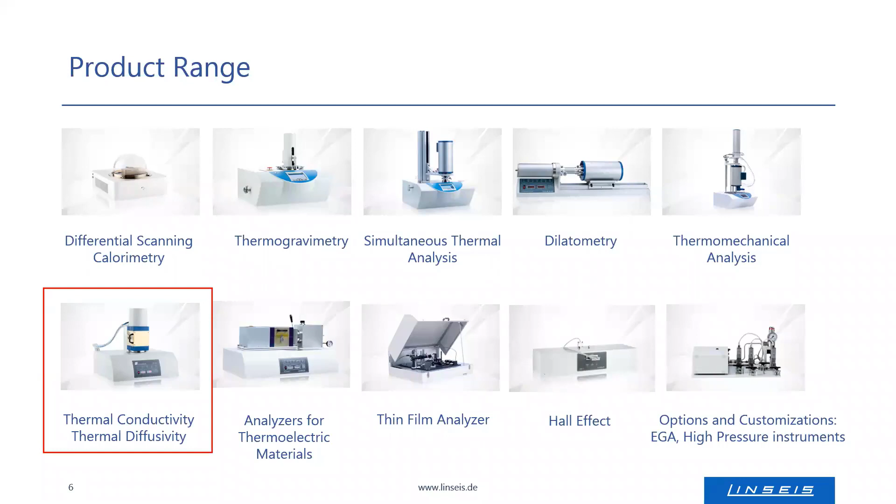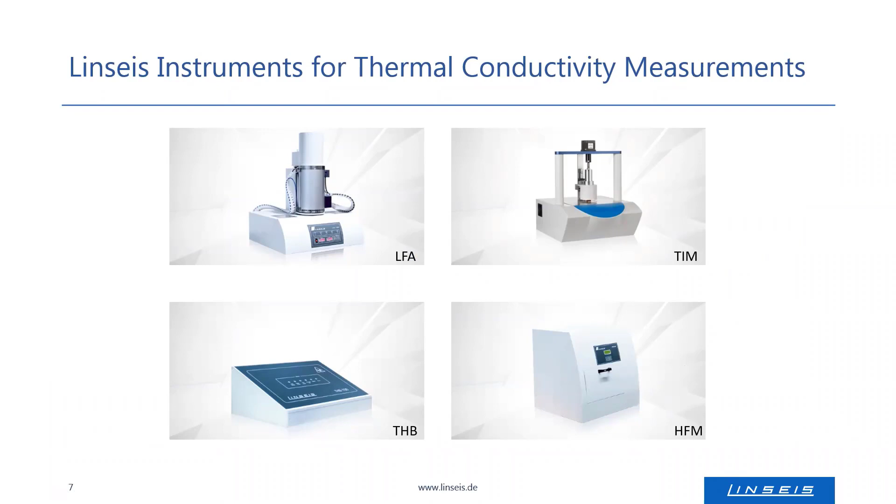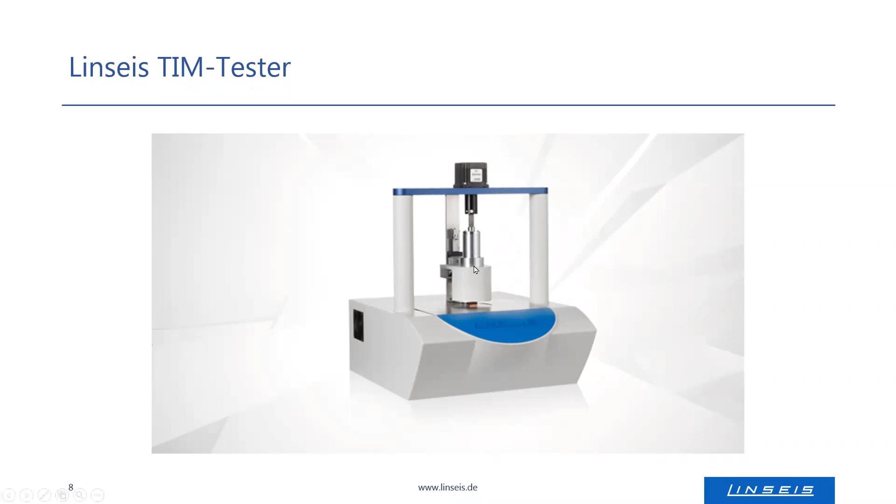So as already mentioned, the TIM tester belongs to the thermal conductivity instruments. Generally to this field belong the laser flash analyzer shown here, the TIM tester, the THB, and the HFM, which is mostly suited for building materials or insulation materials. So today's webinar will be mostly about the TIM tester and also thermal interface materials. What are these in general? And on this picture, you can see an older version of the TIM tester. We modified the system and now it looks like this one here in this picture.

So in general, the TIM tester is a universal device for the determination of the thermal conductivity, and the system is optimized for thermal interface materials and is measuring the thermal conductivity according to an ASTM norm, to which we come later. So here you can see the agenda of today's webinar. First, we have a look onto thermal interface materials in general. Then we will have a look onto the ASTM norm, which I just mentioned. And then we will have a look how this ASTM norm is realized with our TIM tester. And I will show you some application examples of the TIM tester. And in the end, the TEG tester for thermoelectric generators, which is a modification of the TIM tester, will briefly be shown.

So coming now to thermal interface materials in general. Modern technology and technical devices became much smaller and at the same time also more powerful. And the packaging of these integrated circuits is increasing. And thus, the thermal management, how to solve the heat dissipation, becomes a crucial parameter, since overheating of some components can also lead to failure. And the heat sinks are not as efficient as they should be, so often they cannot dissipate the heat optimally. And this depends on the contact surface of the material. And despite modern manufacturing processes, a certain surface roughness remains on these components, as shown here.

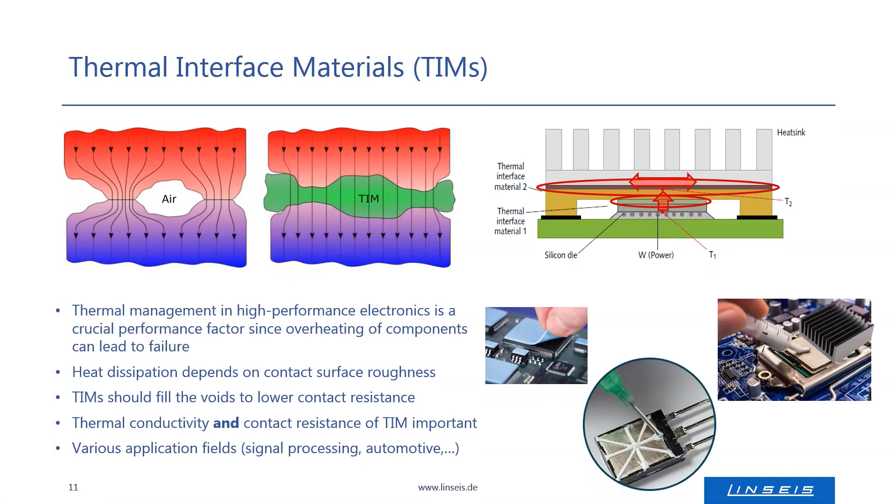The thermal interface materials can be grouped into three categories according to the ASTM norm. So type 1 would be viscous liquids like pastes, greases, phase change materials, or liquids. So these materials exhibit no evidence of elastic behavior or the tendency to return to the initial shape after deflection stresses are removed. So this is what characterizes this type.

Viscoelastic solids exhibit linear elastic properties with significant deflection relative to the material thickness, and examples for that are pads, tapes, foams, or gap fillers. And the third type of the thermal interface materials are the solids, like, for example, polymers, metals, or ceramics. And these types of materials exhibit negligible deflection. So if some stress is applied to the material, no deformation or just a really minimal, negligible deformation can be observed.

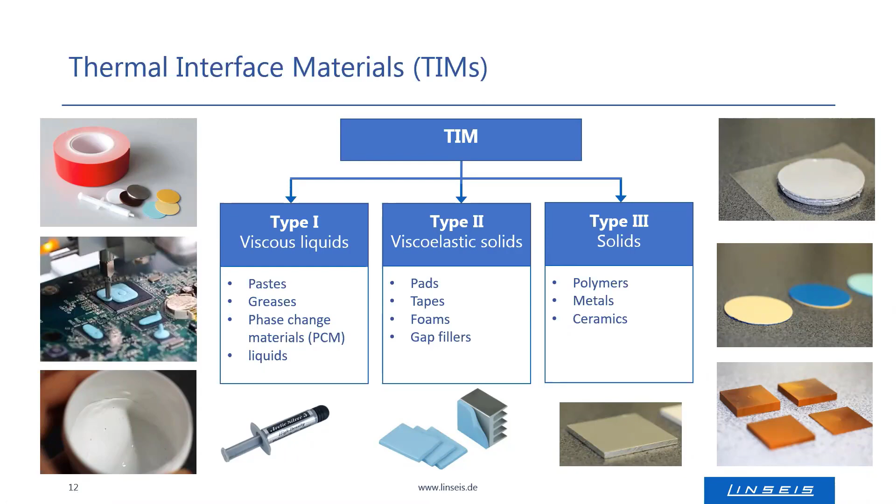To unify the measurement method and some technical specifications, there's the ASTM norm, and this norm describes a test method for the thermal transmission properties of thermally conductive electrical insulation materials. And in the following, we will have a look at the ASTM norm. This ASTM norm describes also how such a measuring instrument should look, or how it is constructed.

And generally, there are two possibilities of measuring the heat flow through the specimen. And one of them is via two meter bars, with a heated and a cooled meter bar. So if this principle is used, a guard heater and a thermal insulation is not required, and the heat flow through the specimen is computed as the average heat flow through both meter bars. So this is also the setup we use with our TIM tester. So we have a hot and a cold meter bar between which the specimen will be placed.

The ASTM norm also defines that the two surfaces of those meter bars have to be parallel within 5 microns and smooth within 0.4 microns. The temperature stability has to be within 0.2 Kelvin. And generally for the measurement, using such a hot plate technique, a sample is sandwiched between those two meter bars, and the temperature of these two meter bars can also be controlled, so that in this case the heat flow occurs from the upper to the lower meter bar.

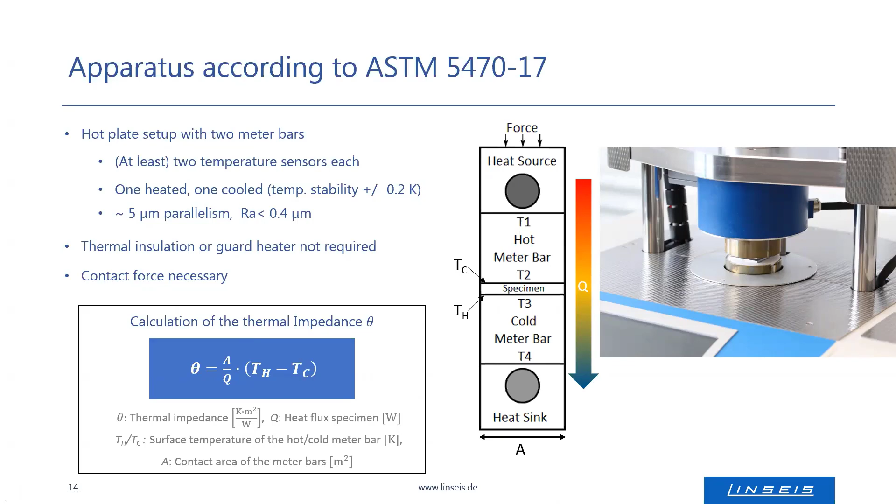And as mentioned, one determines the thermal impedance with the heat flux, and this is repeated for several sample thicknesses. One needs to measure at least 3 different sample thicknesses because one has to plot it like that. So the thermal impedance is plotted against the sample thickness, and this is a linear correlation. So the more different thicknesses are measured, the more accurate this linear fit will be.

From the linear fit, one can then determine on the one hand the thermal conductivity. The thermal conductivity corresponds to the inverse of the slope of this linear fit here. And with the y-axis intercept here, or the offset, one can determine the contact resistance.

In this example, you can see the measurement of a thermally conductive pad. The sample temperature was 50 degrees Celsius. The hot plate had a temperature of 70 degrees Celsius and the cold one 30 degrees Celsius. And one obtained a thermal conductivity of roughly 3.5 watts per meter Kelvin.

And if this measurement is performed under elevated temperatures, the thermal conductivity typically changes, and thus the slope of this linear curve will change as well. And furthermore, if the pressure on the sample is increased, the offset typically gets smaller because of a better contact from the sample to the meter bars. Then this offset will be lower.

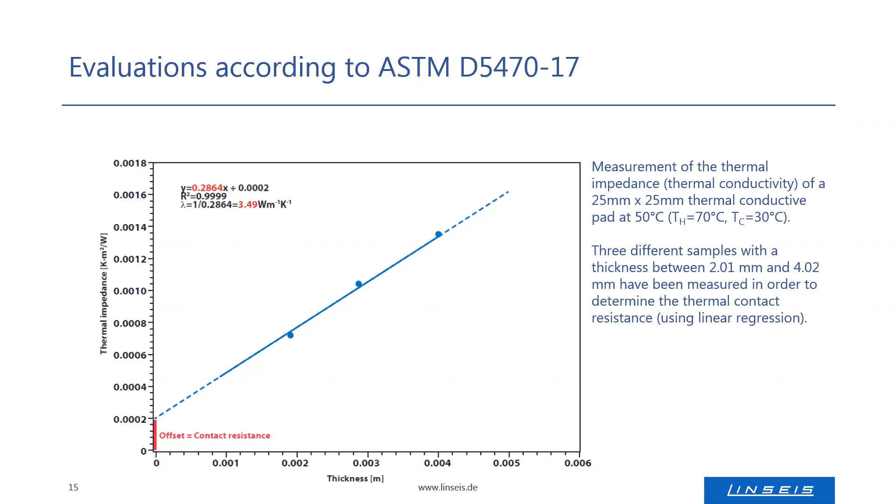In the setup, there is also a load cell for continuous contact pressure measurement, and an LVDT, which is used for high precision thickness determination. These are the main things in the TIM tester. Because of this setup, it is possible to run fully automated measurement cycles, including thermal and mechanical aging studies, compression studies, or the influence of temperature and pressure on the thermal transport properties of the investigated samples.

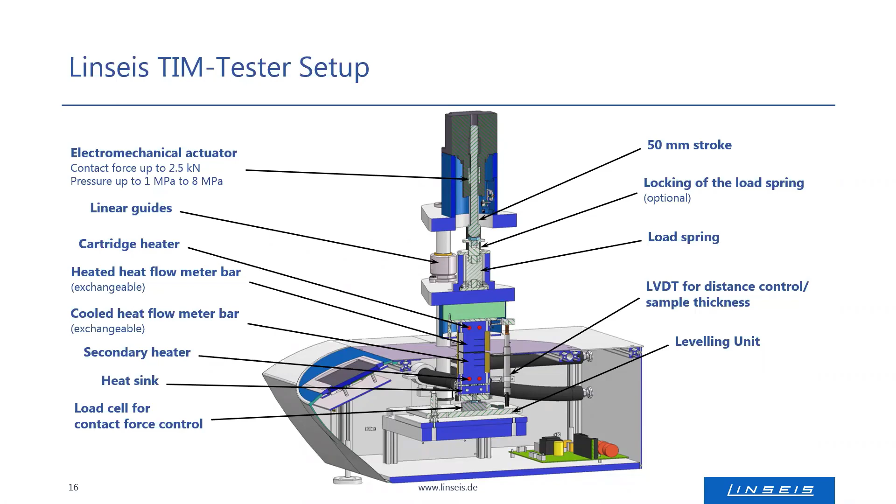Now we come to the TIM tester specifications in a bit more detail. In a standard configuration, the system can be used for measurements from room temperature up to 150 °C. With a different Intracooler option, one can extend this range from minus 30 °C to 100 °C, or with another modification, one can measure from room temperature up to 300 °C. The meter bars are either round or square, with the size ranging between 25 and 40 millimeters. They are isolated shielded meter bars, and these can be changed.

The contact force, as mentioned, goes up to 2.5 kilonewton, which translates into a contact-dependent pressure of up to 8 megapascal, and the contact force accuracy is 1%. With the LVDT, one can measure the sample thickness; the accuracy here is about 0.25%. Typically, one can measure samples with thicknesses of up to 10 millimeters, and the most investigated sample thicknesses are in the range of 0.1 to 5 millimeters.

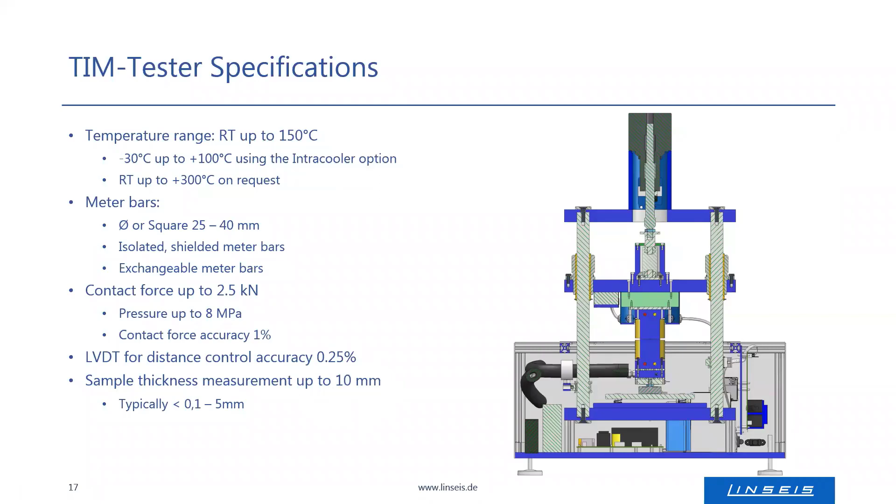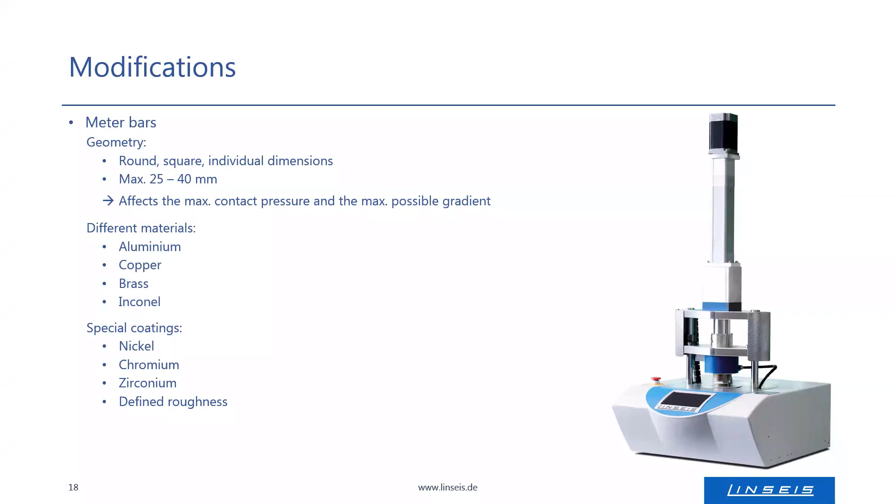As already mentioned in the beginning, we build mostly customized instruments. For the TIM tester, one can, for example, make the following modifications. One can change the meter bars, so the geometry can be round, square, or some individual dimensions. Typically, these meter bars have a size between 25 and 40 millimeters. What is important here is that the size and the shape of the meter bars affect the maximum possible contact pressure and also the maximum possible gradient over the sample. This is because the electromechanical actuator is always limited to 2.5 kilonewton, and depending on the area, this translates into different contact pressures.

The meter bars are available in different materials: aluminium, copper, brass, or, for example, Inconel. The different materials are optimized for different thermal conductivity ranges, and the standard, which is mostly used for thermal interface material characterization, is the aluminum meter bar. There are also different coatings available for these meter bars: nickel, chromium, zirconium, and one can have a defined roughness.

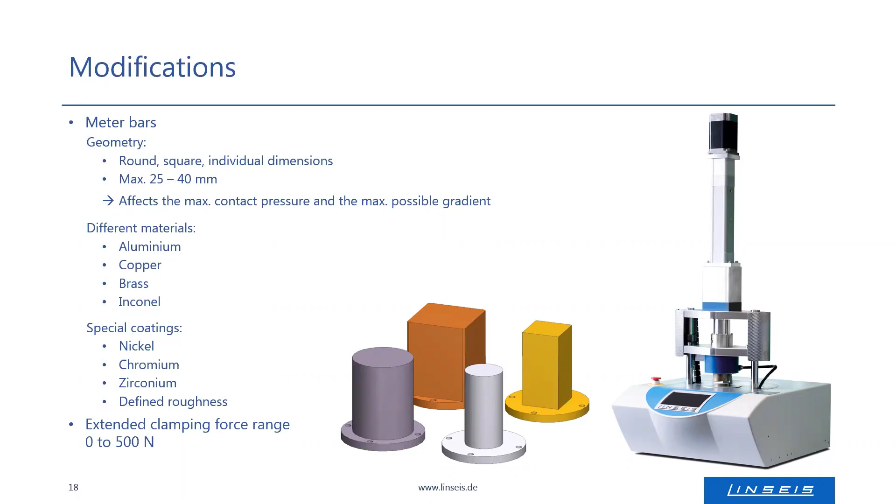Using the TIM tester software, one can realize different measurement configurations, and in general, the software is divided into a setting area. One can see the current values of the measurement, and the third tab will be the results, and there are further add-ons which can be realized for different applications in the software.

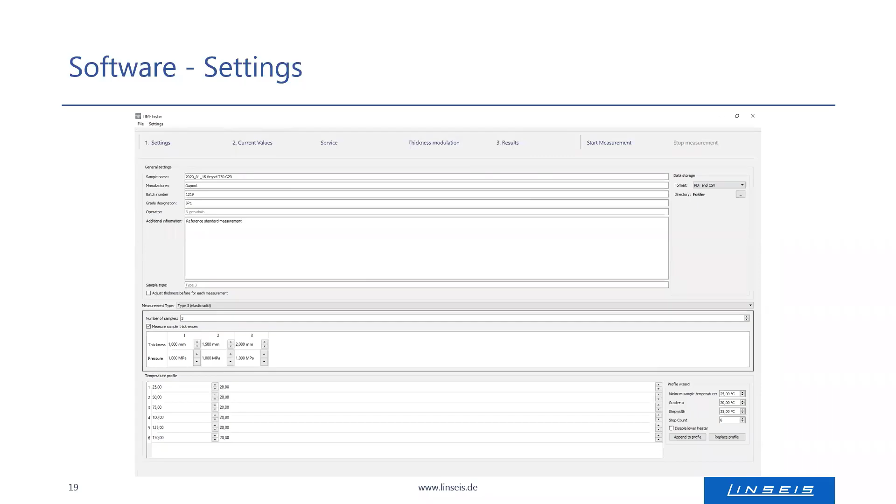So the settings section is divided into some general information like sample name, manufacturer, and so on. One can add in a large field additional information. And one has here the measurement settings. To this I will come in a minute. One needs to define where the data should be stored and also in which form, for example, here in a PDF or an Excel file. And on the bottom, one can set a temperature profile and can also define the temperature gradient over the sample.

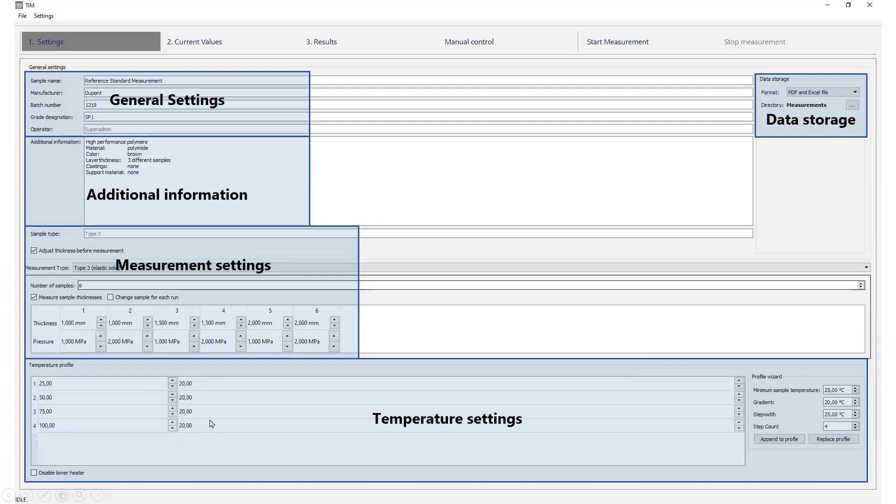So the measurement settings, which are done in the software, differ for each sample type. So for type 1, the viscous liquids, one needs to define the thickness. As mentioned before, one needs to define at least 3 different thicknesses to obtain a good linear fit in the diagram of the thermal impedance in dependence of the sample thickness.

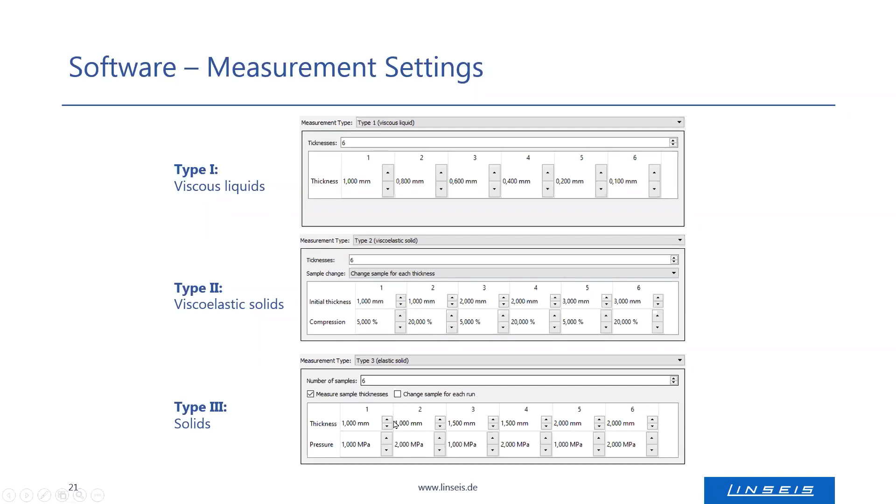So for type 2, for the viscoelastic solids, one typically defines a compression, which refers to initial thickness. Like in this example, one had samples with thickness 1, 2, and 3 millimeter and defined each a compression of 5 and 20%. For the solids, one defines different thicknesses and can also define different contact pressures.